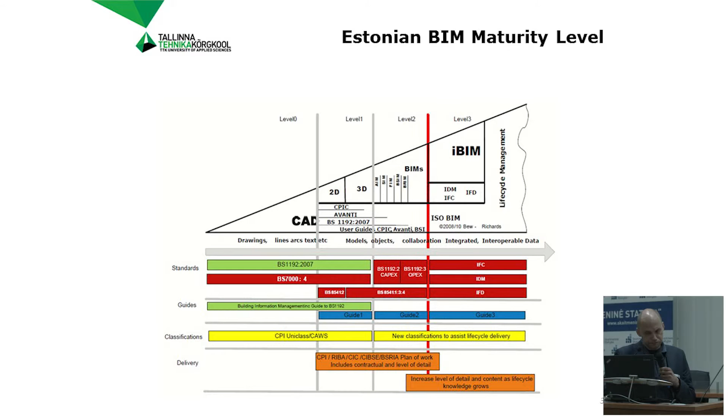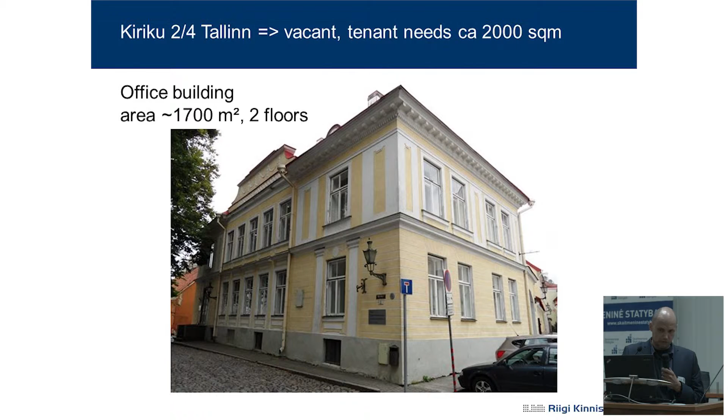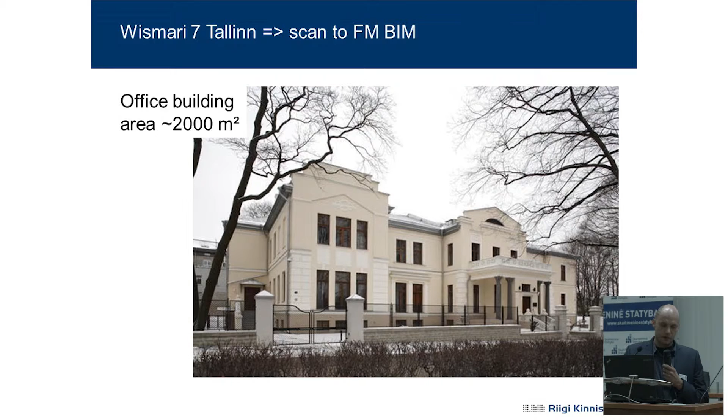Talking about projects - I believe I've shown these before - from the portfolio of Riigi Kinnisvara. We, or Riigi Kinnisvara, initiated this project I think 4 years ago by now. What we can conclude at the moment is that we try to create facility models for existing buildings based on laser scans, and that raised a bunch of questions at that moment, starting from technical parts. Then we had to divide the new responsibilities in the process, which is still quite a crucial factor, because decisions about the locations or techniques used in the process have to be made by the professional who is actually working on the information.

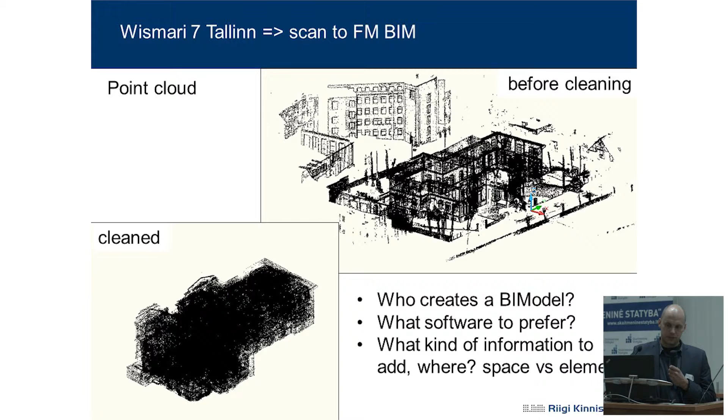For a simple example, if we're used to the surveying specialist taking some measurements and giving us flat plans, that's some kind of simplification of the geometry. And if the designer starts working, they discover that something is missing, and actually the house doesn't look like it should. At the same time, the amount of data is huge - as was said before, big data is coming. I'm not talking about the number of point cloud dots, but we've been asked very strange questions, like if the designer received a point cloud with, say, 27 million points, should we connect all those dots somehow. Many practices came out of this, and I believe this kind of service is now at a quite good level in Estonia, as well as the modeling of the starting position.

And as I said, there was an idea to develop facility models, which brings us to the next big issue - what exactly is the information needed out of the model when we talk about facility purposes.

We were quite brave - we thought we would start by taking this building as an example, and then reduce down the goal. As you see in the last, or lowest, picture here, we were struggling on what a door should be presented as, in general. This led to the need for requirements presented by facility owners, and this is actually the research we are doing at the moment. Probably the preliminary results will be next year. Yes, 4 years ago we thought we were that smart and could figure it out just like that.

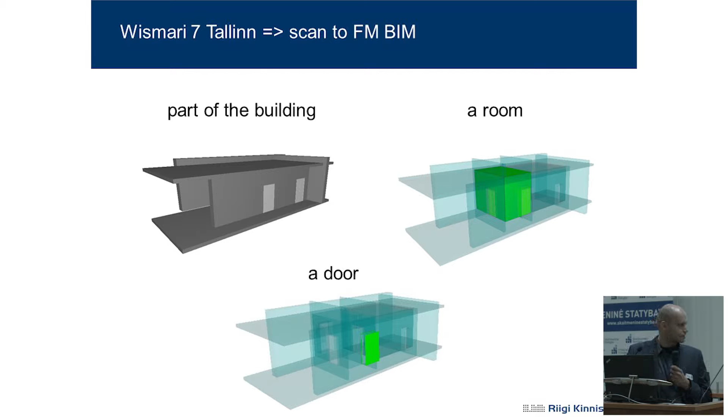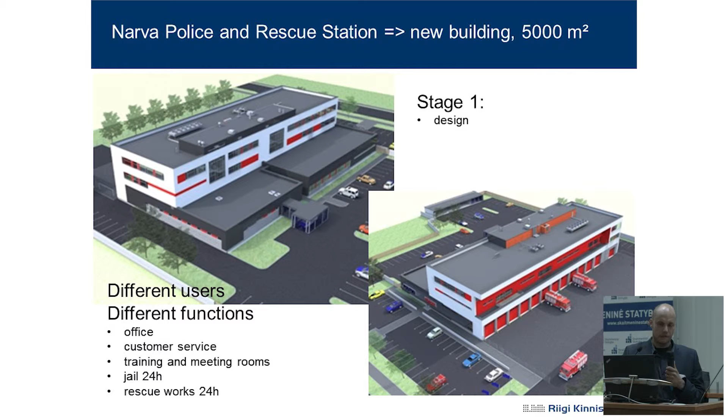Also, these are models from the first public procurement I mentioned, where we couldn't believe that construction companies might be smart enough and clever enough to use models and modeling in their working process, but it turned out that that's possible. Of course, this first project was a nightmare when we look back, starting from the techniques used, and also the actual collaboration in the process - we cannot say there was almost any when you talk about design parties. But the good feedback given by the clients is that the logistics is very good. This is one of the biggest wins in this project, I believe.

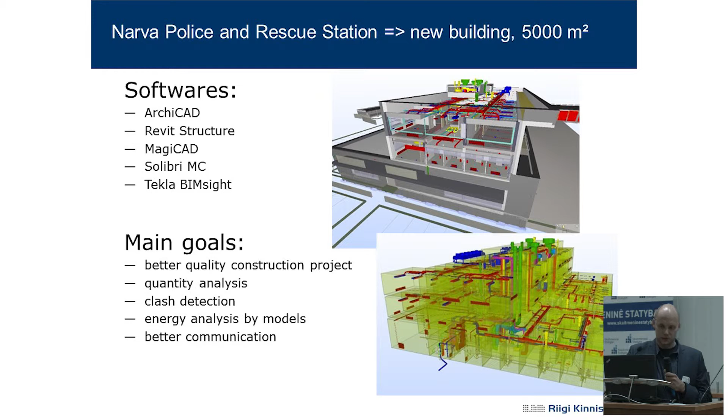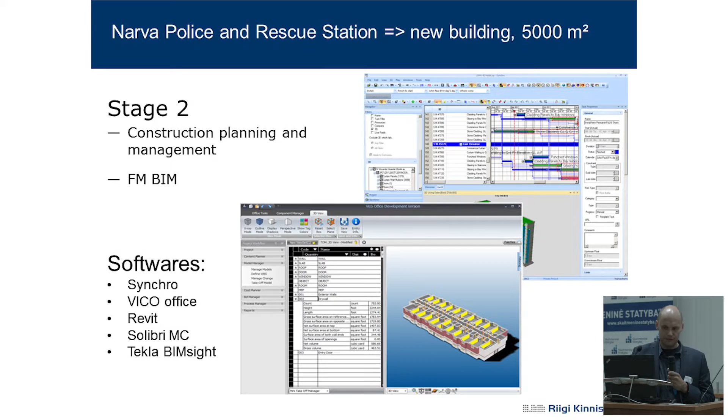We were also working with students on that project, testing different software concerning construction management.

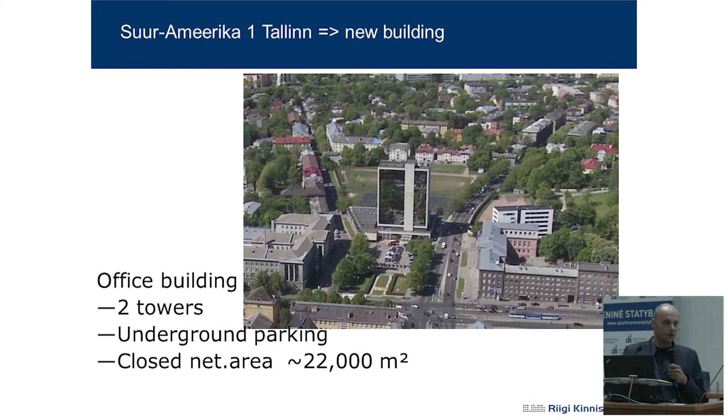And actually the design has also changed completely. But this also leads to one very important factor, which almost isn't involved with BIM technology, but this is the knowledge about big procurement processes and, let's say, how to design the price of a future building actually, if you have some targets, and how to hit the target price.

Actually, the work process and the design was finished and it was quite detailed, but now it was started all over again, starting from scratch, because after it was finished, it turned out that it didn't fit the budget, actually. It's quite sad. But this is a side effect which should be calculated also, and as I said, this isn't something where we can say that if we had 3D models... you see, we have 3D models, but now there is also needed the knowledge involved, different areas which are supporting the project itself.

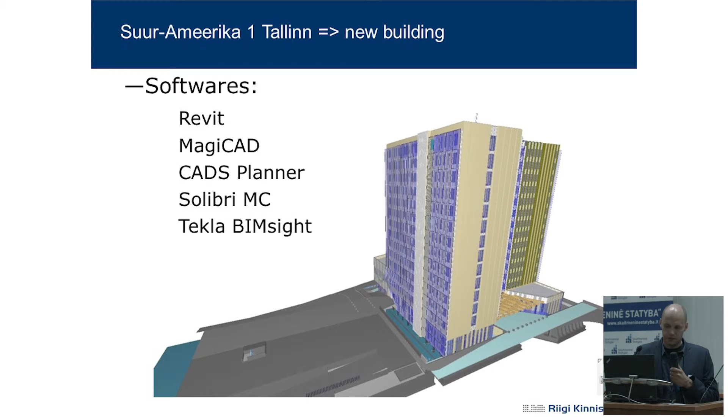Okay, the presentations here today, I believe those were quite outstanding, and if I'm people from the street, just a client, it may be a little bit confusing. There is a huge bunch of info I have to consider, and also I should be quite clever in that process to, let's say, handle the process itself, because this building here is quite big, and now there is a question: what should be checked actually, is it just a simple collision checking, or is there anything else which needs to be checked?

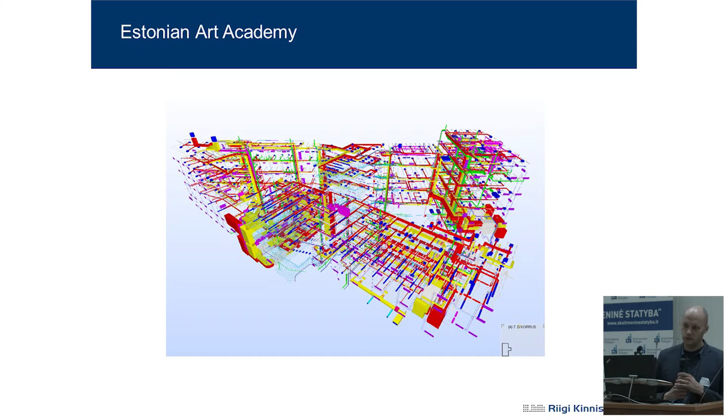One more important factor I forgot before, but I need to say that we have now the requirements for design, but since contractors are now active, it seems that we should revise all those documents, because now the contractors are really getting into it, starting to ask questions, and are adopting those models into the process. Because we have to be fair that the models created for design purposes may not be suitable for contracting and for building.